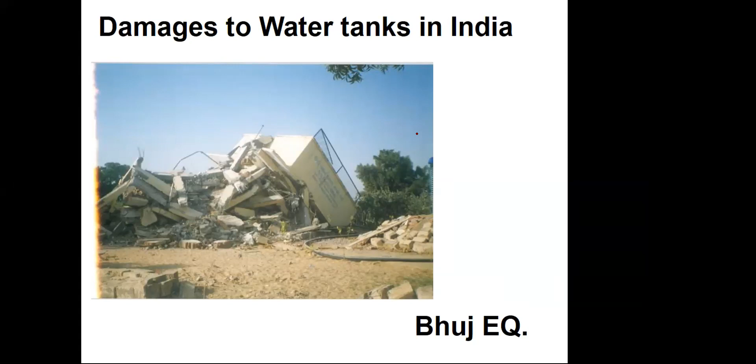But in past earthquakes - Bhuj earthquake, Jabalpur earthquake, and some northeastern earthquakes - we have seen water tanks have suffered damage. They have become non-functional if they have not collapsed. So there is need to look at these things carefully and critically.

The water treatment plant there had some ground-supported rectangular tanks. It had damage here, a crack. This type of thing.

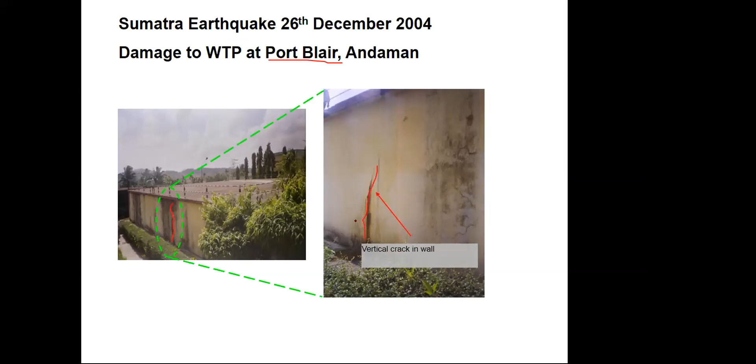Again, partially underground tank suffering damage. This kind of water treatment plant has a circular RCC tank. There is a manhole here, so water sloshed from there during the earthquake.

There is no damage to this tank as such, but during earthquake, water sloshes. Since this tank was full, water sloshed from here. When we visited that place, the maintenance people there told us that during ground shaking, water came out of this thing. So water sloshed - this is an important thing.

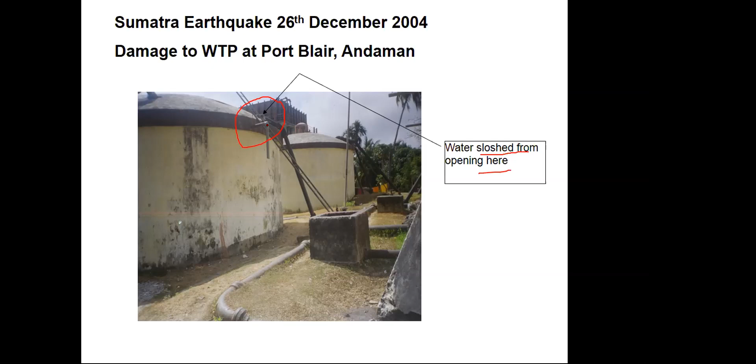When sloshing, water goes up, so it should not hit the rooftop. There should be sufficient space and things like that. So water sloshing gives useful information regarding how tanks have behaved during the earthquake.

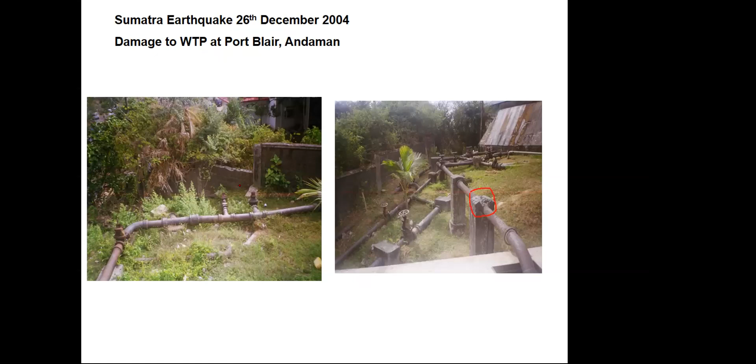Because even if the water tank remains intact but the pipeline gets damaged, then our objective that water supply should remain in place gets lost. Now this is, in brief, the occurrence of an earthquake.

There is a focus where rupture takes place or some sort of fault gets initiated. From there, stress waves travel - body waves and surface waves. The point exactly above the focus is the epicenter. Then surface waves and body waves travel, and at any location we feel the earthquake in the form of shaking of the ground.

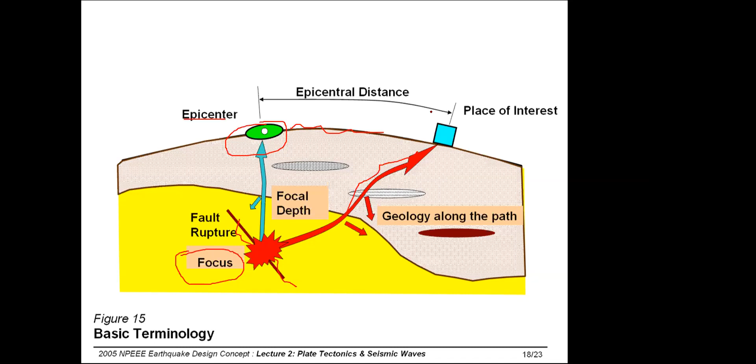How ground will shake at a particular location during an earthquake depends on many parameters: where the epicenter is located, how deep the focus is or what the focal depth is, and what is the soil media from the epicenter to the place where our structure is standing. All these factors dictate the characteristic of the ground motion at a particular location, and that is how intensity gets decided at a particular location. Magnitude of the earthquake is dictated by how big the fault has ruptured, how big the event is, how much energy has been released, and things like that.

As you must be knowing by now, the horizontal component of ground motion is more severe, more critical than the vertical component. So first we give importance to horizontal ground acceleration, though vertical ground acceleration is also important in certain cases, and due cognizance of that should be taken.

So during earthquake, ground shakes, and ground shaking is resolved into three components: one horizontal, a second horizontal component, and the third is the vertical component - like this, x, y, z, three components.

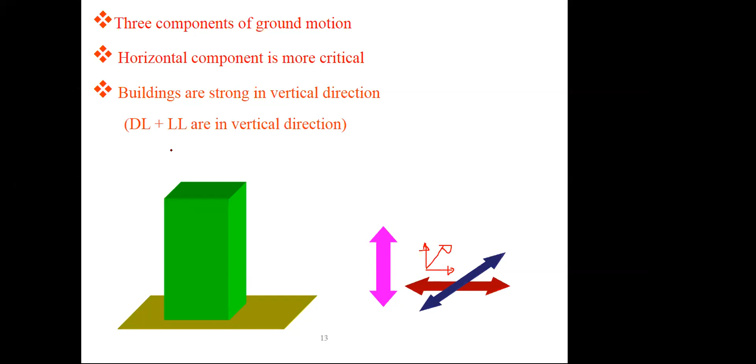And in addition to these three components, dead load and live load are acting there. Now, how much earthquake force will act on the structure during ground shaking is very simple.

Structure is standing and suddenly the ground shakes in the horizontal direction, so the structure is imparted with some acceleration. Then the force acting on the structure will be given by Newton's second law of motion. What is that? Inertia force.

Force H here is horizontal force, which is acceleration into mass. So if any body is imparted some acceleration, and if the body has some mass, then that body will be subjected to inertia force, equal to mass into acceleration. That is broadly Newton's second law of motion.

So how severe the ground motion is, how severe the ground shaking is, that will decide the value of alpha here, and how heavy the structure is, that will decide the value of m, mass of the structure. So earthquake force itself depends on the mass of the structure, mass of the building.

So many times we hear that for better earthquake response, a structure should be as light as possible. Wooden structures in hilly areas are preferred because their weight is less. Since their weight is less, during an earthquake less force will act on them, and since the force itself is less, their performance should be satisfactory.

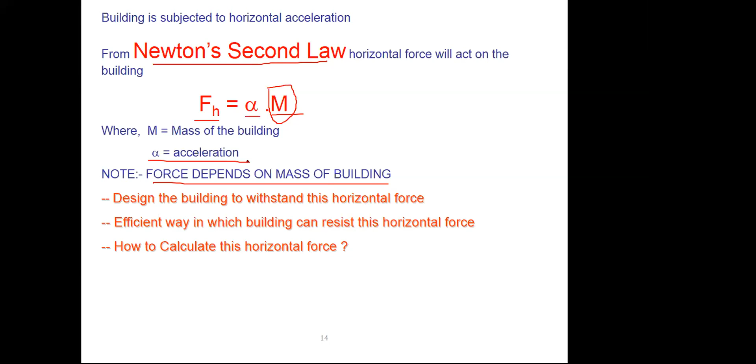And alpha, the acceleration of that structure, will of course depend on how severe the earthquake is and what is the characteristic of that body or structure.

So this is simple, alpha into m. So I divide alpha by g, and multiply m by g. Multiply and divide by g, nothing will happen. Mass into g, mass into acceleration due to gravity, is weight of the structure, W. And alpha by g becomes a non-dimensional parameter.

Precisely this is the expression given in IS 1893: the total horizontal earthquake force on a structure, V, is some coefficient AH into W. This is what you must have seen. And AH, the name given to AH is design horizontal seismic coefficient, some coefficient, a non-dimensional parameter.

For any structure, the formula for AH is Z by 2 into I by R into SA by G. Essentially this formula is nothing but mass into acceleration, but since it has been non-dimensionalized, mass has become weight, and AH has become a non-dimensional parameter.

Now there are three components to it: component number 1, component number 2, component number 3. The first component is zone, in which zone we are located. In our country, the Himalayan belt is more sensitive.

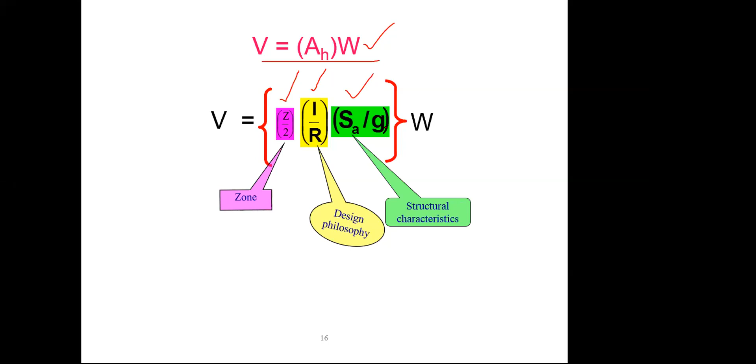SA by G is the structural characteristics. We'll see this one by one. IS 1893 was first published in 1962, and then these are the years when its subsequent revisions have come.

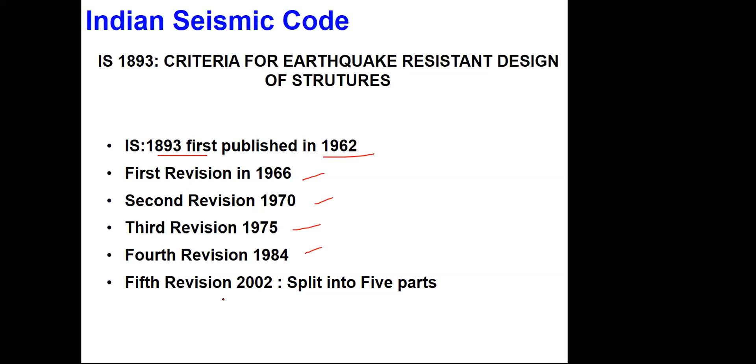In 2002 it was revised in 5 parts, and now it has been again revised in 2016. The next version has been published in 2016. The other parts of IS 1893...

This part 2, which we are discussing, was published in 2014. Bridge and retaining wall, I think Dr. Ingde will take you through this, published in 2015. Part 4, industrial structures, was first published in 2005 and then revised in 2013.

Part 5 is yet to be published, written in red color here. It is yet to come, but its draft version is in circulation, I suppose. So this is the background of IS 1893.

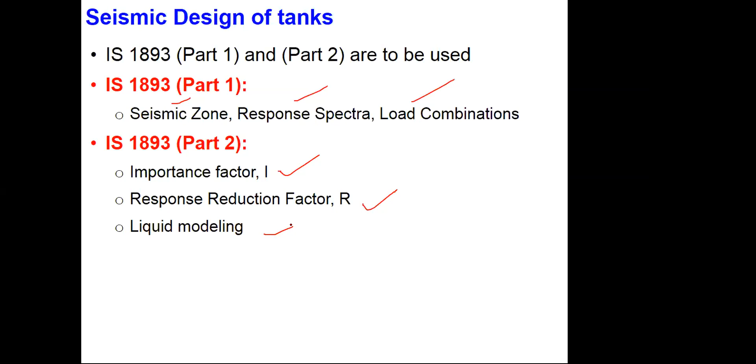Now in part 1 we have the seismic zone map, response spectra, and load combinations. Part 2, which deals with water tanks and liquid storage tanks, will give us the I value for water tanks, the response reduction factor for water tanks, and how to consider modeling of liquid, because liquid sloshes during ground shaking and during any dynamic loading.

So now we come back to this formula. As I said, Z comes from the zone map. This is our zone map.

We have 4 zones in our country: zone 2, zone 3, zone 4, zone 5. There are zone factors given for each zone. For zone 5, value of Z is 0.36. For zone 2, value of Z is 0.1. So that is the zone map.

Now we are discussing few things about buildings. For a building, SA by G will come from this response spectra. Now for building, to use this SA by G from this formula, we should know the time period of the building.

What is the natural period? What is the natural frequency? Natural frequency from structural dynamics point of view is given by under root K by M. So as such, if somebody has to find out the natural frequency, then one will have to calculate stiffness, mass, and use under root K by M.

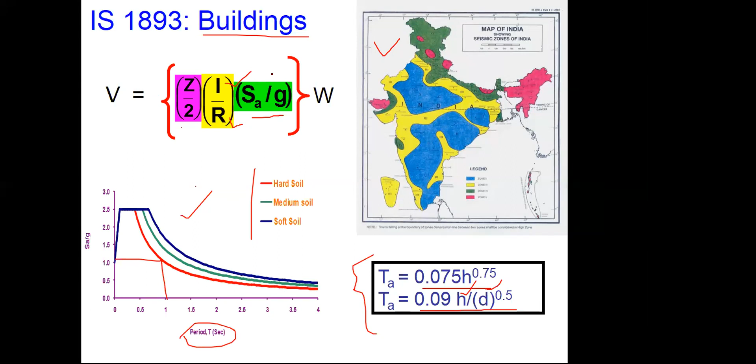Now, once you know the total force, it can be distributed to various floors in the form of hyperbolic distribution, parabolic distribution, H-I-square. And that is how you know the earthquake force for a building. So for a building, in equivalent static analysis, first step is to calculate time period, then use this formula, and then distribute the earthquake forces at various floors.

Now, for buildings, there is another method known as response spectrum method. Therein, first you have to do the modal analysis of your building to find out the modal frequencies and mode shapes. If you take first 3 modes of a 3-degree of freedom system, then you will have 3 values of A, Z by 2, I by R into SA by G corresponding to all 3 time periods. Then you have to calculate story force in each mode, then story shear at each floor, at each story in each mode, and then calculate Q1, Q2, Q3 by suitably subtracting them.

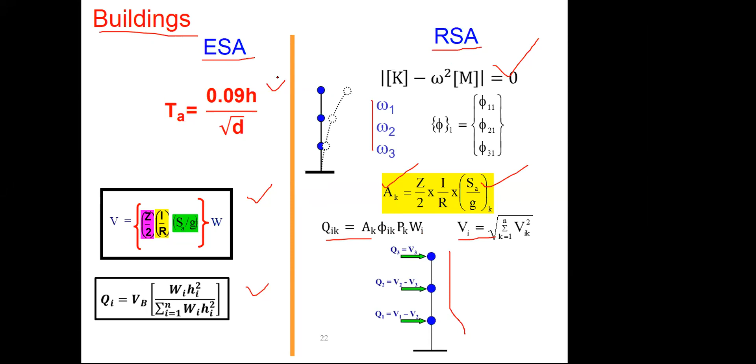So there are 2 methods: one is equivalent static analysis, another one is response spectrum analysis. For building, both have been explained in IS 1893 part 1, and accordingly one can use it.

Now, coming to 1893 part 2, this is the front page of that document. Now, what is it that 1893 part 2 will tell us? There are some scope, references, symbols, and there are some provisions. In that provision, spring mass model, since we have to model the liquid.

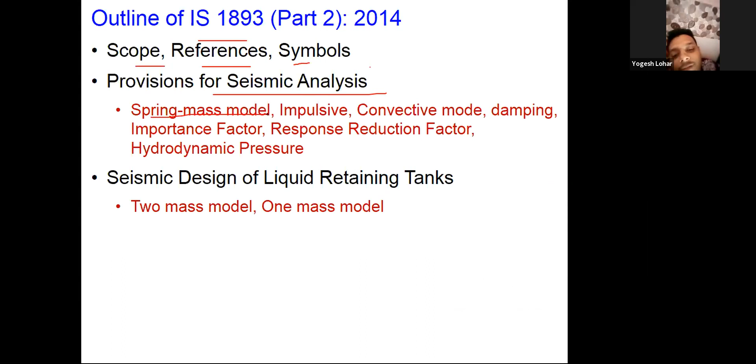Hello, sir. Hello. Khandwe sir, you are telling something? Participant has unmuted himself. You can continue, sir, please. By mistake, he has unmuted. Sir, please continue, sir. Yeah. Okay.

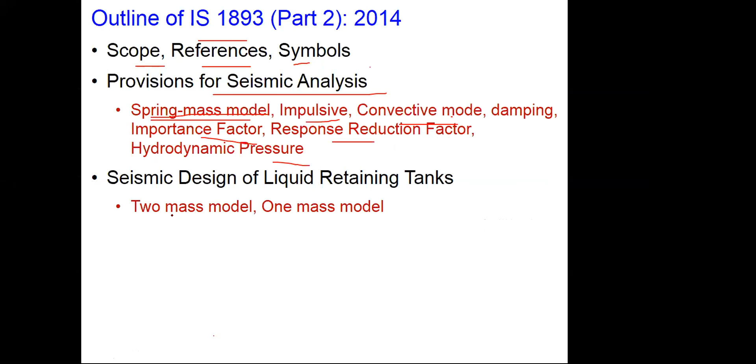So in this part 2, apart from scope, references, and conventional sections and symbols, we will have some provisions on spring mass model. What is impulsive mass? What is convective mass? How much importance factor to take? How much reduction factor to take? How to calculate hydrodynamic pressure? The spring mass model, or two mass model, for liquid storage tank is very popular, and we will see that.

Then there are some miscellaneous provisions, something for safety of piping. In steel tanks which are used in petroleum industry, the steel shell should not buckle, so provisions on that. But also for buried tanks, P-delta effect, and quality control provisions for RC frame, RC shaft, RC tank, strong column weak beam, staircase — some of these provisions are also explained.

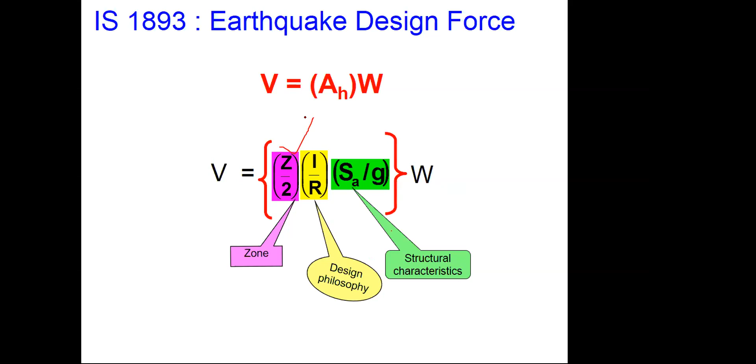So this is how earthquake force is to be calculated for water tank. Now, first we start with Z, which will remain same depending on whether it is building or tank. If you are in Nagpur, you will be in seismic zone 2, so value of Z will be 0.1. If you are in Guwahati, then you are in zone 5, and you will have to take 0.36.

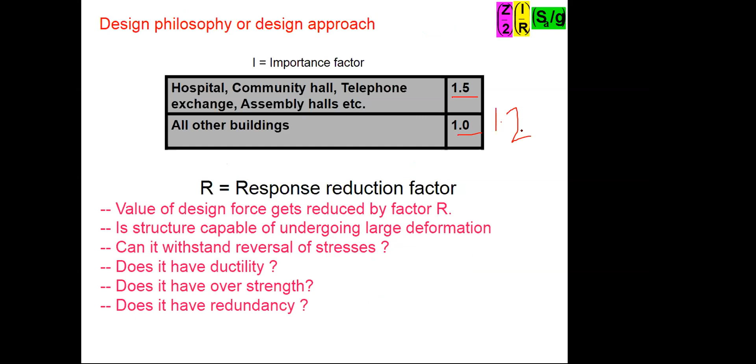So Z remains same. Now, I for building — there are two values, 1.5 and 1, and of course nowadays in the new code there is a value of 1.2 also for those flat schemes where more than 200 people stay. And R value depends on how good is the energy absorbing capacity. For buildings, typical R value is 5 or 3 for moment resisting RC frames.

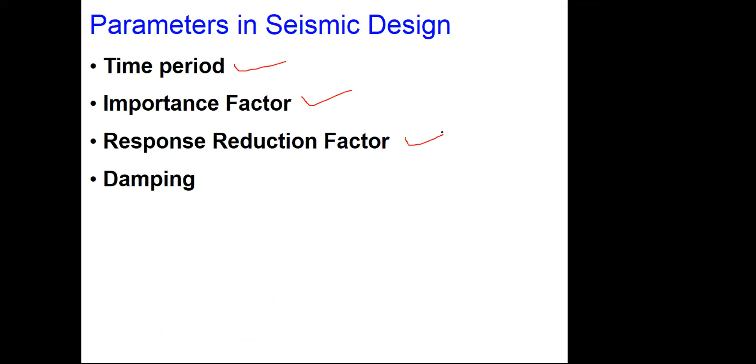So for water tank, the time period formula has to be different — we can't use 0.09H by root D. Importance factor has to be different. R factor has to be different, and of course damping value will have to be different. So we will consider these things.

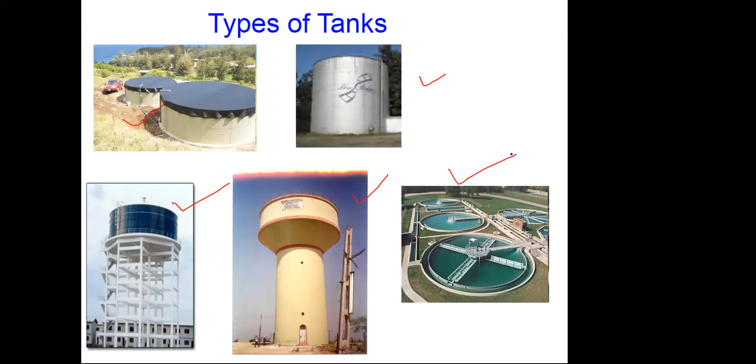So broadly these are the types of tank structures we will be dealing with: ground supported RC tank, ground supported steel tank, elevated tank on frame type of structures, elevated tank on shaft type of staging, and underground tanks. So provisions for all these types of tanks will be given — ground supported tanks, elevated tanks, and underground tanks.

Now we will start with the physics of the problem. What happens when there is a water tank filled with water or any liquid? If the ground shakes, what will happen to these water tanks? The first thing, which is different than a building, is that the liquid will slosh. There will be a sloshing mechanism, and because of this there will be pressure on the wall.

Now, pressure on the wall — there are two types: hydrodynamic and hydrostatic. Even when there is no earthquake, if a tank is filled with water — even a bottle filled with water, our Bisleri bottle — water exerts hydrostatic pressure on the wall of the bottle. But this hydrostatic pressure is uniform in all directions, and hence the bottle doesn't topple, because there is equal and opposite pressure in all directions. So for hydrostatic pressure, its net horizontal force is zero.

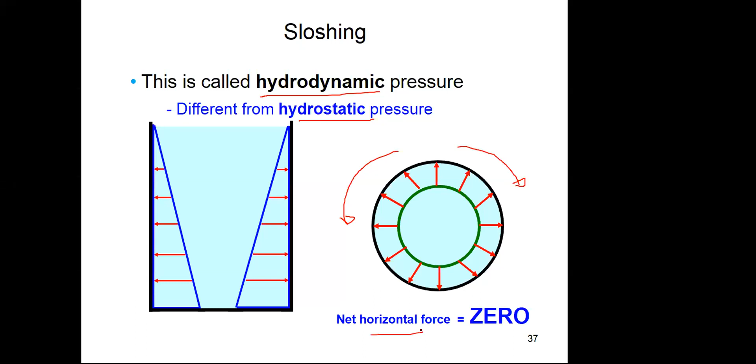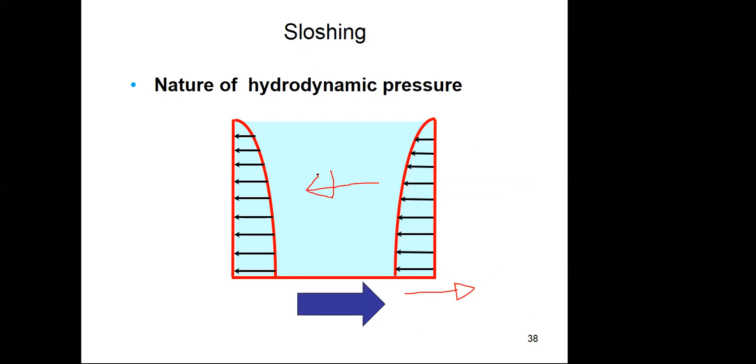Now you come to ground shaking. If ground shakes in this direction, the entire liquid will go in the opposite direction. So on one side of the wall there will be more pressure, on the other side there will be less pressure. So there will be net horizontal force acting on the tank wall in one direction. In plan, if you look at it, there is a central line of the tank — there is more pressure on this side and less pressure on the other side wall. That is how hydrodynamic pressure acts, and net resultant pressure and force will not be zero.

So liquid sloshes. Now the sloshing of the liquid is basically a fluid mechanics problem. Housner, in 1963, analyzed this by writing the fluid equations, the Laplace equation for fluid, and then he came up with a simple mechanical model known as the two mass model, where he said that some portion of the liquid will be sloshing and some portion of the liquid, which is at the bottom, will remain rigid.

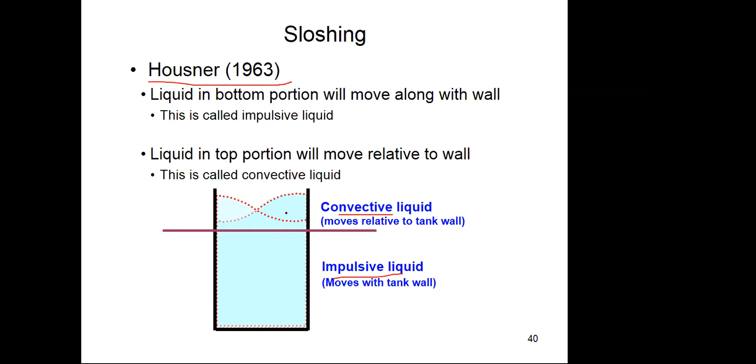It will vibrate along with the wall, whereas liquid in the top portion will be undergoing sloshing, and that is known as convective liquid. It undergoes convection. Impulsive liquid will simply be vibrating or moving along with the wall. So some part of the liquid is rigidly connected to the wall, some part is flexibly connected to the wall. So there are two types of divisions: convective liquid and impulsive liquid.

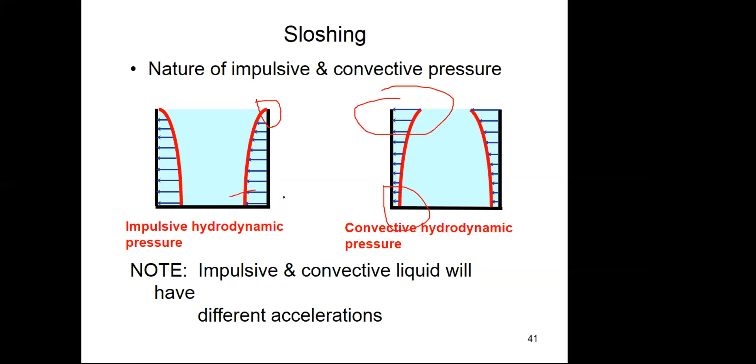They have their own pressure distributions. Convective liquid will have convective pressure, which will have more pressure on the top, less at the bottom. Impulsive liquid will have very less pressure at the top, at very high value at the bottom. So these will be pressure distributions. So there are two types of issues: convective and impulsive.

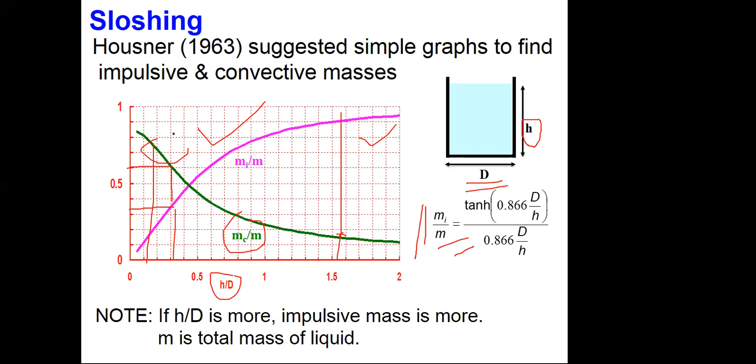So what does it mean for shallow tanks? For shallow water tanks, sloshing component of liquid will be predominant. So if liquid height or depth is less, then sloshing will be more. In Hindi, there is a saying, 'Adi ghagri chalkat jaye' - if liquid is less, then sloshing is more. If liquid depth is more, then this chalakna or sloshing is less.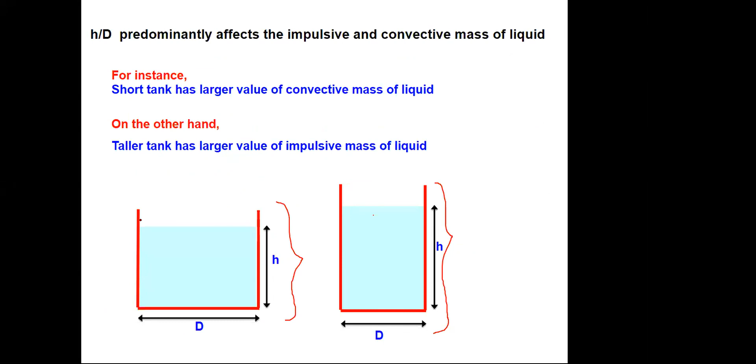So now we have sorted out the issue that there were two types of forces which will act on the tank wall: impulsive force and convective force. Impulsive force will come from impulsive mass. Convective force will come from convective mass. Then this impulsive mass will act at a height hi, and convective mass will act at a height of hc.

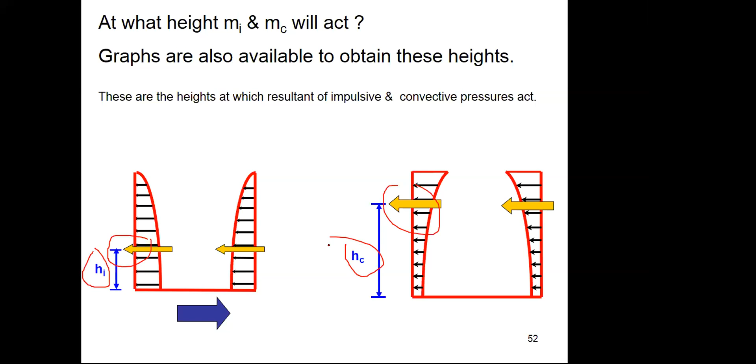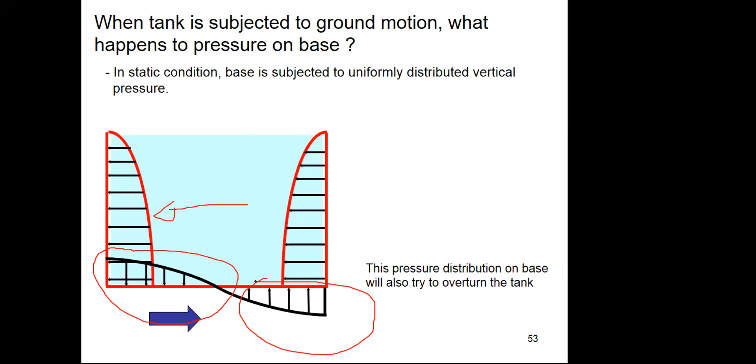Now they will create the overturning effect. Tank will have tendency to overturn because of this. Now, if liquid goes in one direction, then the vertical pressure on the base slab will also get changed. This side vertical pressure on the base will be more, this side it will be less. So this will also create an uneven pressure distribution, which will also add to the overturning. And if that effect is included, then these forces will act at still higher heights.

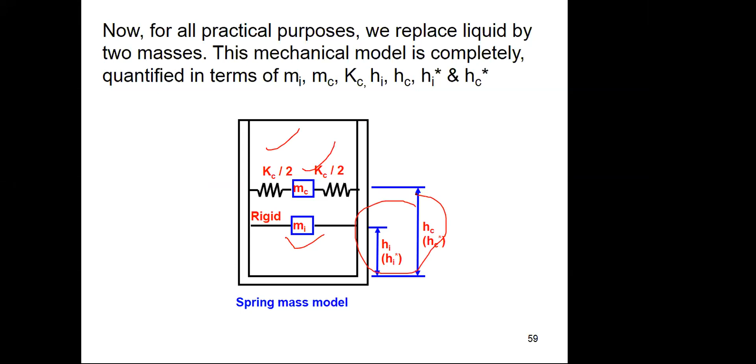Rather than hi, it will act as hi star if this base pressure uneven distribution is accounted for. Similarly, we will have hc star, and that can be obtained from the ready-made graphs given. So now we are ready. We know how much is our mi, we know how much is our mc, we know kc, we know at what heights this will act. So this whole tank filled with liquid is now converted into a mechanical model whose all the parameters are known.

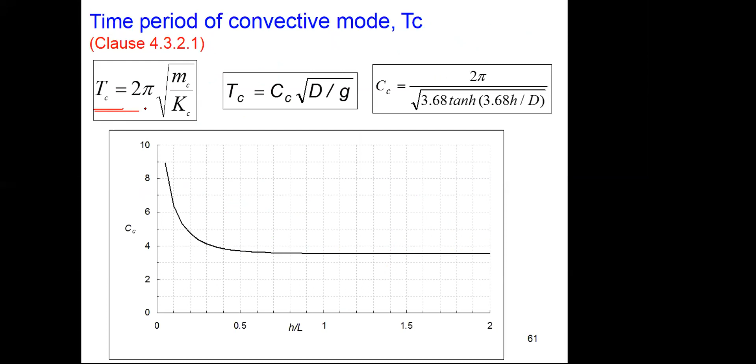Once that is known, rest of it is simple. You know mc, you know kc, you should calculate convective time period. Some ready-made charts are given for that. Then you can obtain impulsive time period also. Impulsive time period for ground supported tank will be different, and impulsive time period for elevated tank will be standard formula 2 pi under root m by k, where m will consist of impulsive mass and structural mass.

Structural mass will include what? It will include mass of container and 1/3 mass of staging. So mass of container means everything: wall, roof, slab, base slab, and staging, 1/3 mass has to be added. And Ks is the stiffness of the staging.

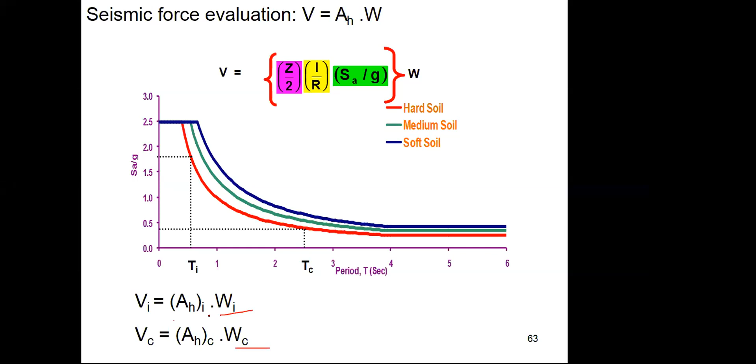So since now we have two masses, impulsive and convective, there will be two time periods. So there will be two Ah, Ahi and Ahc. We calculate these forces, and add them using SRSS, square root of sum of squares. Vi square plus Vc square and under root of that, square root of sum of squares. That is the total earthquake force which will be acting.

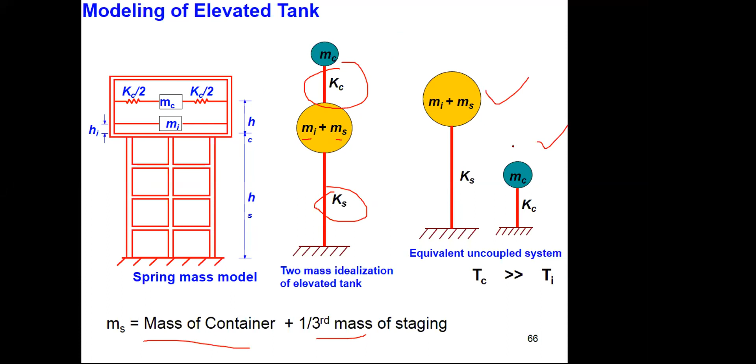Now for water tanks, you have two mass model. Ks is stiffness of staging, Kc is stiffness of convective mode. Mc is convective mass, Mi is impulsive mass, Ms is structural mass, that is mass of the container plus 1/3 mass of staging. Now, rather than solving a 2 degree of freedom system like that, one can use two different single degree of freedom systems, because their frequencies or their time periods are well separated.

You can have them separately so that complications because of solving a 2 degree of freedom system won't arise, and this assumption is valid because Tc is much larger than Ti. So that we will calculate for elevated water tank. In elevated water tank, if you have to calculate Ks, stiffness of staging, you will have to apply force P at the CG of the container, and that CG should be connected with the frame in rigid fashion, and get the delta. Once you know the delta, Ks can be obtained.

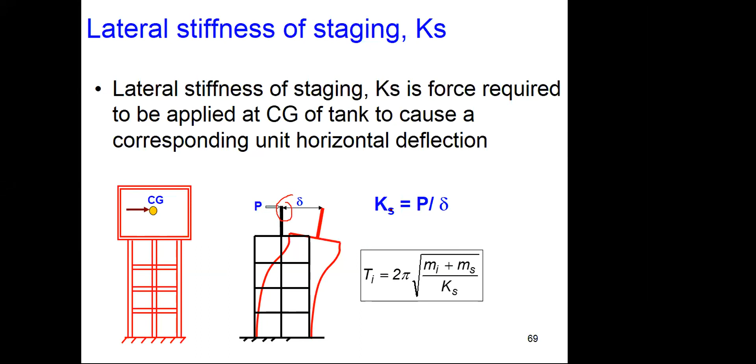This is a standard exercise in mechanics. So this is first difference. In elevated water tanks, you have to calculate time period like this, whereas in building, things were readily given. Though it's an empirical formula, it was readily given for standard or normal types of buildings. If building is having too many complications, then of course this formula will not be applicable even there.

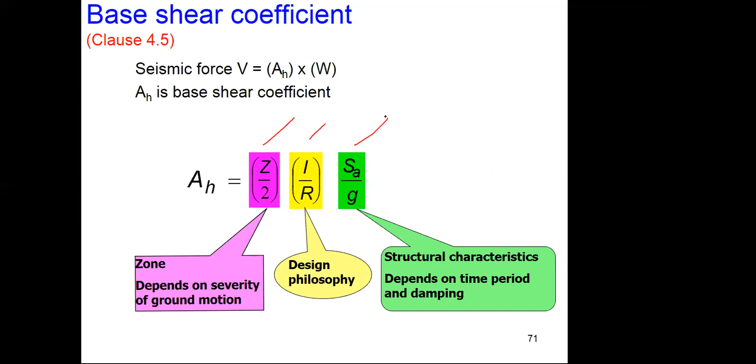So now we know Z, we know SA by G. Time period we will be knowing. I and R we will have to sort out. So we will have these two formulas and we add them.

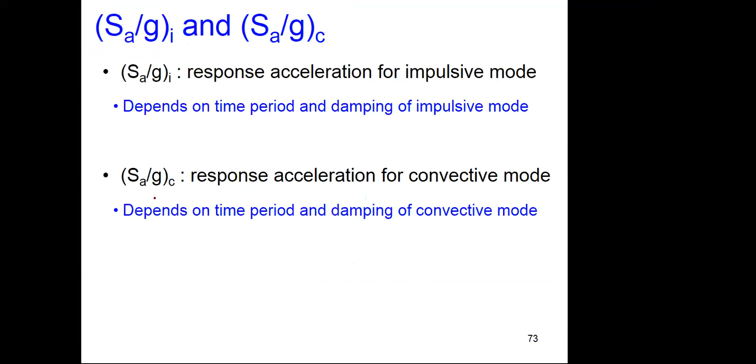Now there is one more issue. This SA by G corresponding to convective mode, damping is very less. So we consider convective mode damping as 0.5%, and hence we should multiply this factor by 1.75. Multiplying factor is 1.75. Same thing is done in other codes. Those of you are interested, Eurocode and American Concrete Institute, their multiplying factor is 1.5 and 1.673, while in our code, that multiplying factor because of lesser damping in convective mode is 1.75.

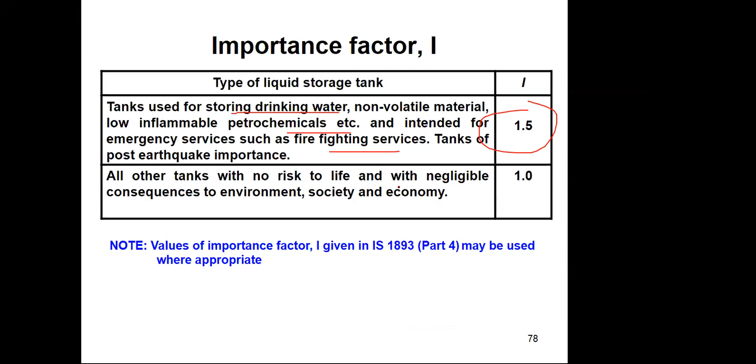That is what is here, I, importance factor. This is the table from 1893, black and white, and I have converted it into like this. So we should use I equal to 1.5 for most of the tanks - tanks used for storing drinking water, non-volatile material, low inflammable petrochemicals, firefighting services, and tanks which are important in post-earthquake functioning should all have I equal to 1.5. All other tanks which don't have any risk can have 1.

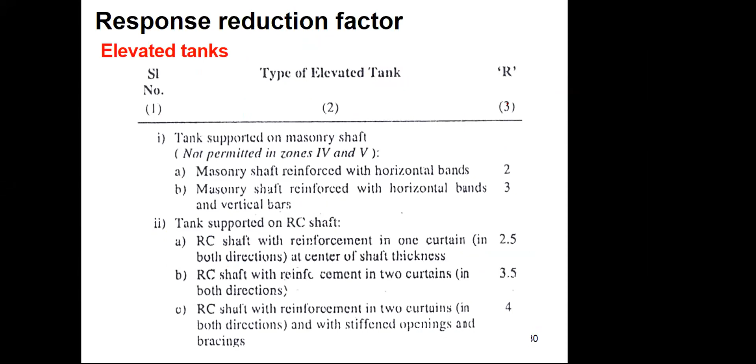Then R value, response reduction factor. Response reduction factor is given differently for different types of tanks. Let me come to that one by one. Here of course these values are given.

There are tanks which are of importance to us: elevated water tank supported on RC frame, elevated water tank supported on RC shaft, and elevated water tank supported on steel frame. This is as far as elevated water tank types are concerned.

For them, the R value maximum is 4 if all precautions are taken and all ductile detailing provisions are obtained. Or if it is an elevated tank wherein a shaft is used, then R is either 2.5 or 4. So this is how the R values are given.

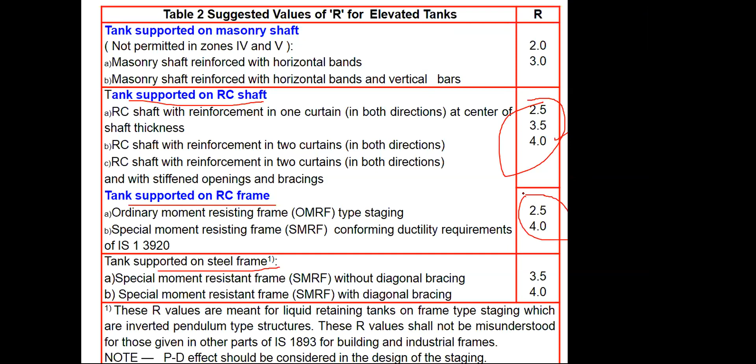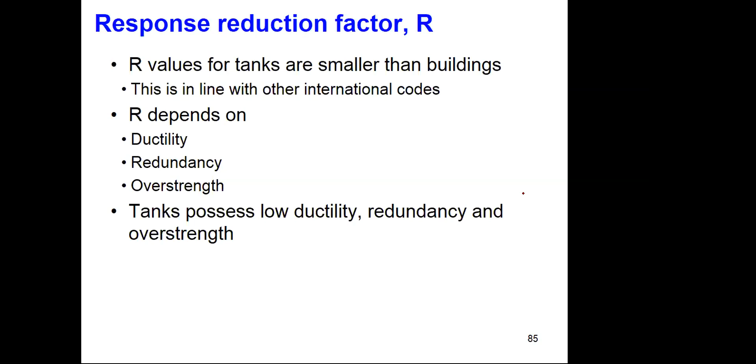Now, one can argue why R values of water tanks are different from R values of buildings, and that is a topic where additional work is required, wherein you should assess the ductile behavior of a building frame versus a water tank frame. There is a difference between water tank frame and building frame. So whereas for building R is 5, for water tank it is given as 4. But even whether 4 is sufficient or not needs to be properly addressed and sorted out.

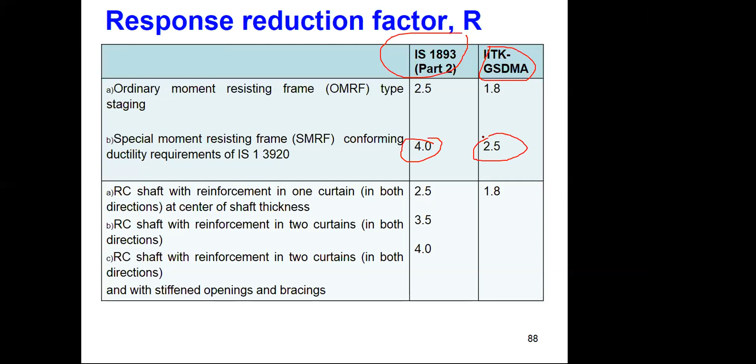Now there is a difference between IS 1893 Part 2 and the IITK GSDMA guideline. The code says you can take R value as high as 4 for special moment resisting frame, but the IITK GSDMA document says you should take it only 2.5, not more than that. So this type of difference exists, and there are bases for that which have been discussed, comparing with other international codes and things like that.

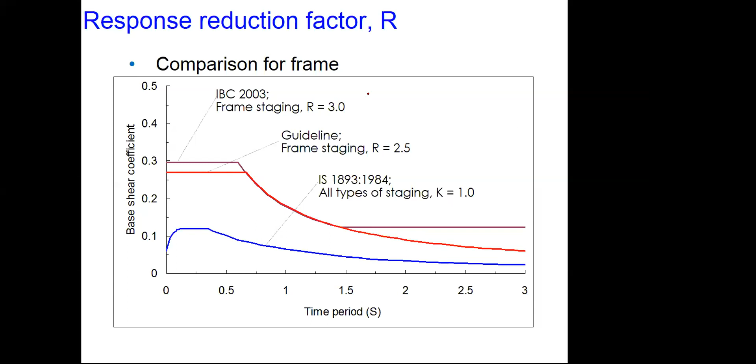Now, water tank and building have certain differences. Number of load paths in case of building are more. Buildings have walls also, whereas water tank frame staging doesn't have a wall — it is a bare frame. Then in case of building, beam sizes are quite reasonable, quite heavy, whereas in water tank, braces are not that heavy, they are nominal sizes. So R values are different for various reasons, and that is the difference between these two.

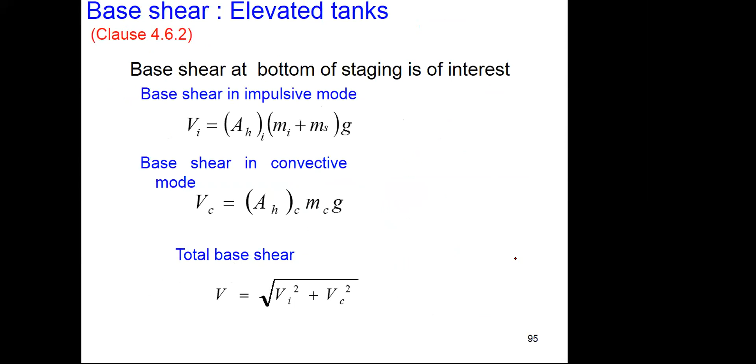Now once we know how to calculate convective time period, convective force, and impulsive force, then other forces like roof force and wall force can all be added. All impulsive things can be added together, all convective things can be added together, and then the total overturning moment will again be obtained using SRSS, square root of sum of squares, for overturning. So this is the brief of that: you calculate impulsive, calculate convective, and then total base shear. There's nothing more than that.

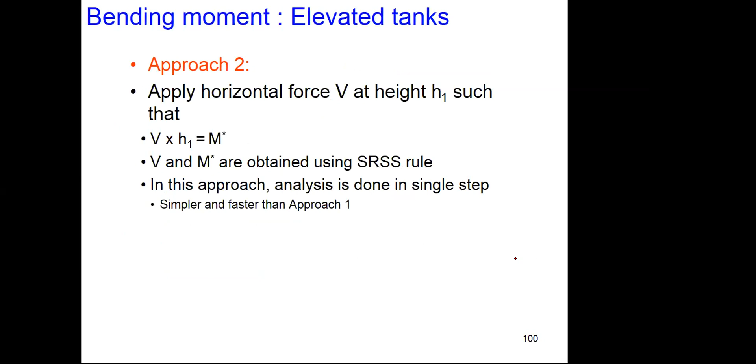There are some additional things. In another 10 minutes or so, I'll try to finish off. The main part we have discussed is how to calculate earthquake force and how to apply it.

Now, empty tank should also be analyzed. You should analyze tank full condition, but one should also analyze empty tank. What will happen in empty tank? Mass will be less, but since mass is less, your time period will get reduced, so your Sa/g value could be higher, though your W itself has reduced. So the critical condition should be analyzed in case of empty tanks. Empty tank analysis should be done.

Next is direction of seismic force. In case of building, what is the provision? The provision is that if a building has orthogonal frames in plan, it should be analyzed first for loading in the X direction, next for Y direction, and they should not be combined together. You should treat both as two different cases.

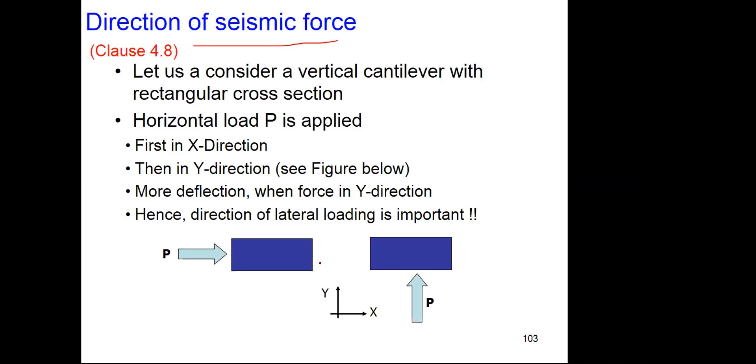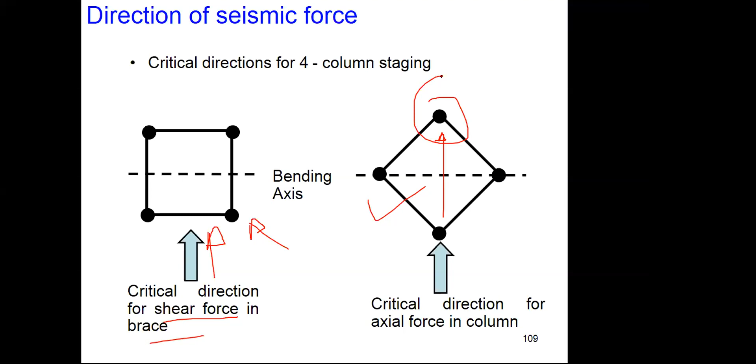Now, in case of water tanks, the critical direction should be obtained. Let us see this. If you have an elevated water tank with 4 columns, and you analyze the building for earthquake in one direction, you will find shear force in the braces is very high. But if you apply the earthquake in the diagonal direction, then axial force in the column is maximum. So for column design, you should apply earthquake in the diagonal direction, and for beam design, you should apply it in either the X or Y direction. Similar guidelines exist for 6 column staging and 8 column staging as well.

If critical direction cannot be ascertained, then the 30% rule should be applied: 100% in X direction plus 30% in Y, and vice versa — 100% in Y and 30% in X. Or SRSS can be done.

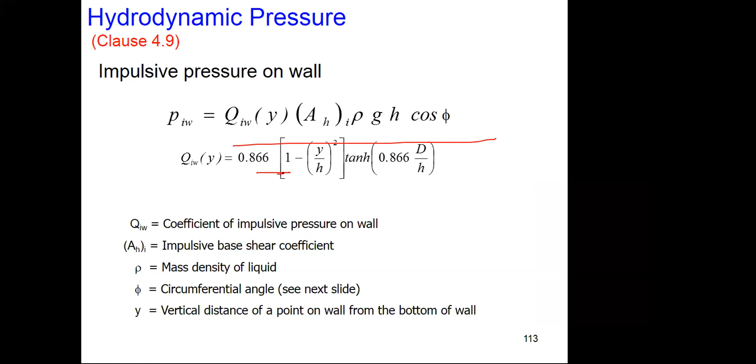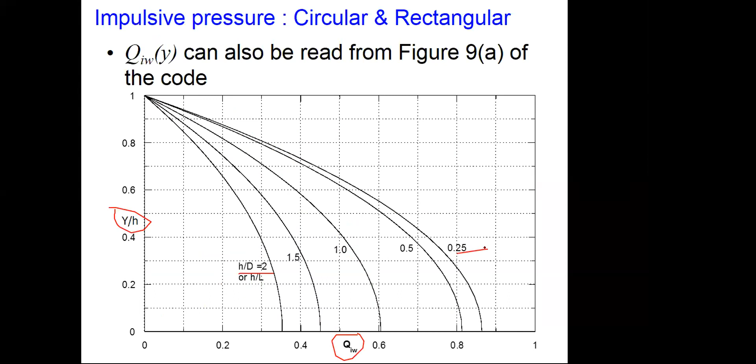Okay, so this is how impulsive pressure varies along the height of the wall, this QIW coefficient. It's a function of H by D, and here H by D is 0.25, meaning very shallow tanks. These pressures can be obtained for circular tank as well as for rectangular tank. There are ready-made formulas given for pressures and coefficient of pressures.

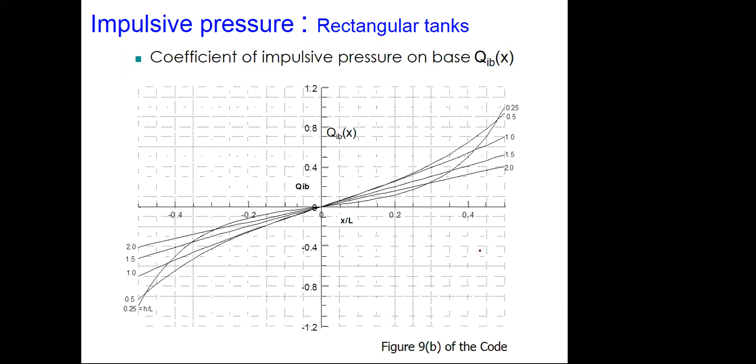There were some corrections. You can take note of this in some of these graphs in IS 1893 part 2. I think in the amendments now they are correcting it. So pressure graphs have to be used carefully. As I said, they are taken from the IITK GSDMA document, so you can refer that document. That document has correct graphs and correct figures at various places.

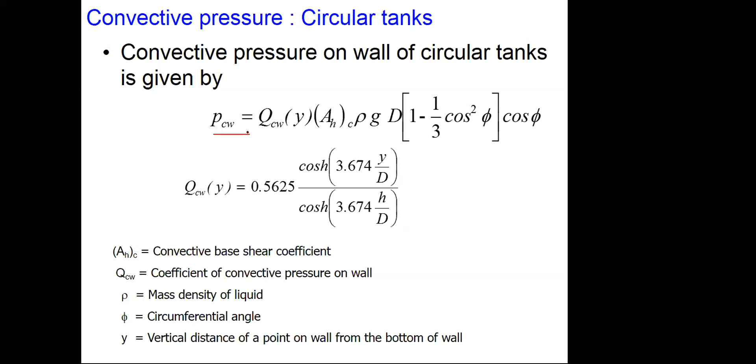Convective pressure and impulsive pressure both have to be calculated on the wall. This is for convective pressure. Then on the base also, water pressure will exert, that should be calculated. Again, same thing for wall, convective. So pressure on the base, that can be obtained.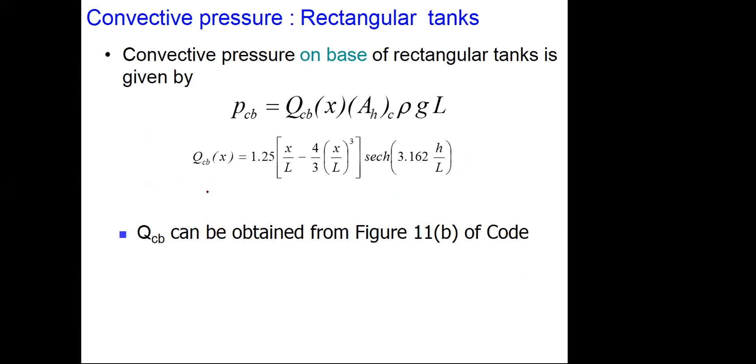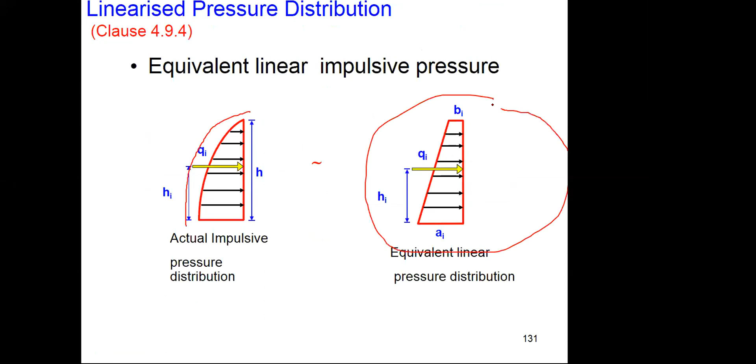Now a few things about how to design the wall. Total pressure acting on the wall is impulsive pressure plus convective pressure. This impulsive pressure distribution, which is parabolic, is converted into a trapezoidal shape, and this trapezoid is further divided into one rectangle and one triangle. From IS 3370, you know the moment coefficients for uniform loading as well as for hydrostatic loading, so the total moment exerted on the wall can be obtained. Similarly for convective mass also.

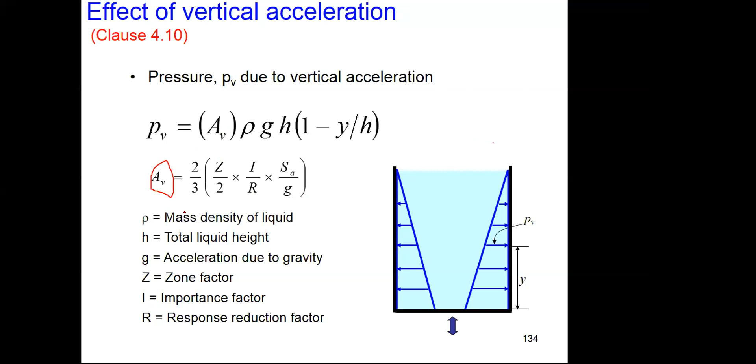Then if vertical excitation is included, water weight will increase and decrease because of change in G value. Like when we go up and down in a lift, we feel as if there's some problem in our stomach because of change in the weight - sometimes we feel weight loss, sometimes we feel heavy and our legs suffer some sensation. So all those things happen. AV, the coefficient of vertical acceleration or design coefficient, is given by 2/3, and the value of Z by SA by G will also be something different.

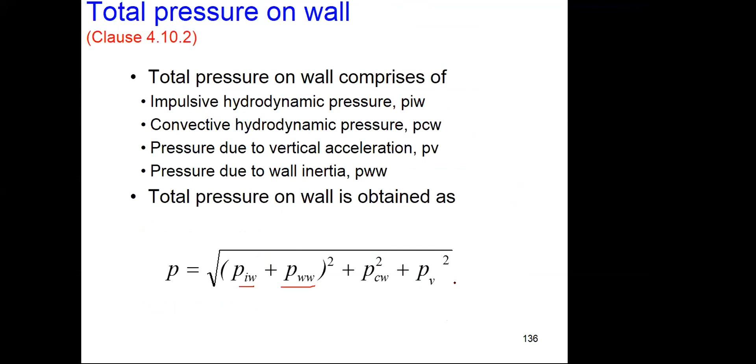Pressure on wall will exist, so you will have to combine all this pressure - impulsive pressure on wall together, convective pressure, and then vertical pressure. They have to be added using SRSS. Then sloshing wave height - when liquid will slosh, that wave height can be calculated, a ready-made formula is given for that. One should ensure that the free board provided at the top, particularly in water tanks, should be sufficient.

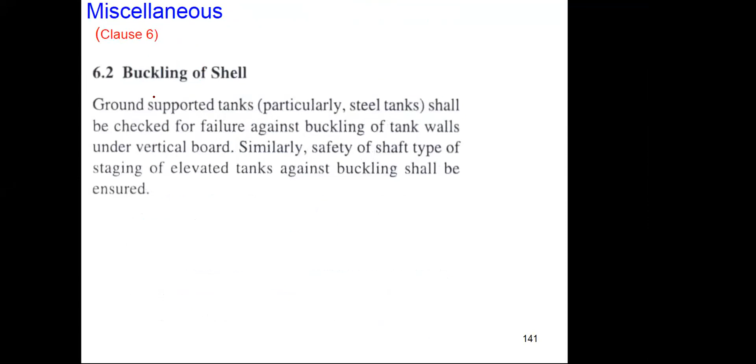Now these are the miscellaneous provisions. There is a provision on piping, it should be flexible enough. Buckling of steel shells - buried tanks have some provisions too. Shear transfer: in the case of elevated water tanks, the container and its base slab are very rigid, then suddenly flexible staging starts, so at that place shear should be properly transferred. The code says P-delta effect should also be taken into account.

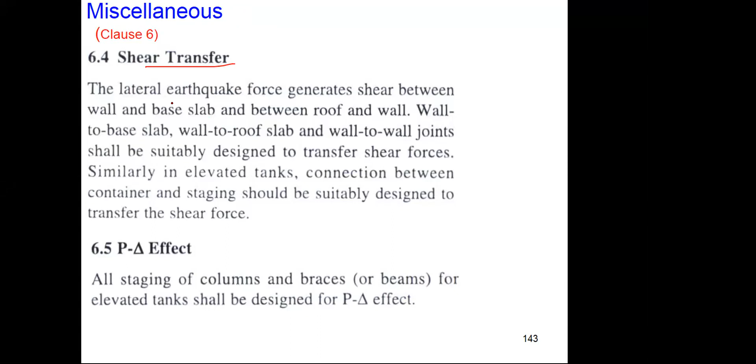Then aesthetics - these are some of the clauses. It says water tank, all said and done, is a landmark structure in any city, village or town, so it should look reasonably good. Aesthetics should not be compromised too much. If there is a proposal to provide an elevated water tank with some architectural features, they should be entertained and proper precautions should be taken. Then quality control.

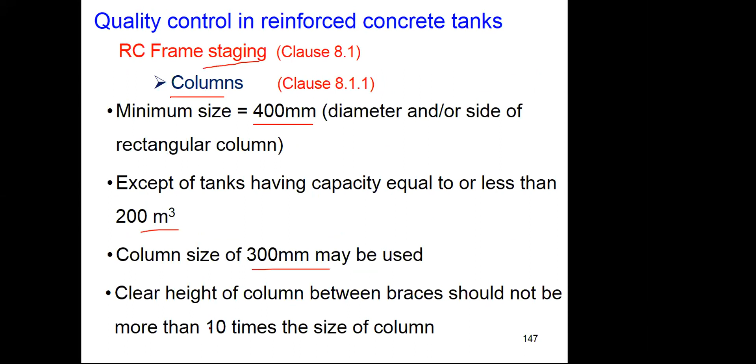Some of the things I will quickly tell: for columns in RC frame staging, minimum size should be 400 mm. If the tank is very small, then you can provide 300 mm. Column height between two braces should not be more than 10 times the size of the column, so bracing should be provided. Then reinforcement detailing should be done as per IS 13920.

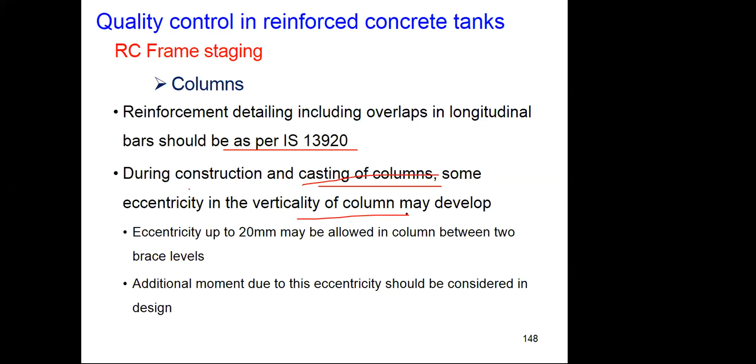So some precautions have to be taken, as given here, for columns and similarly for braces. The minimum width should be 1/30th of its clear length, and in zone 4-5, diagonal bracing should be provided.

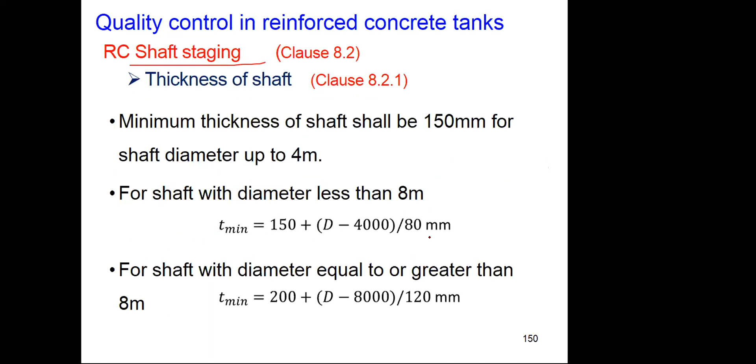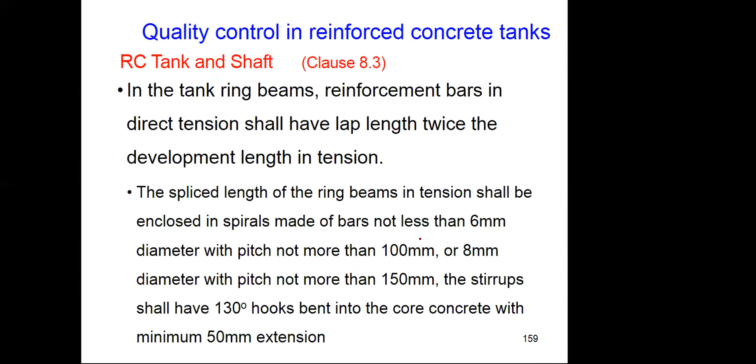For foundation, similarly provisions are given for RC shaft. How much should be the thickness of the shaft? Thickness of the shaft, its reinforcement, and things like that - quite a bit of information has been added here, and they are useful for shaft as well.

Strong column, weak beam - it exists in buildings also, so that will continue in elevated water tanks. For water tank staging profile, there is a code IS 11682. Those of you who are interested can see the provisions of this, and they will have to be followed.

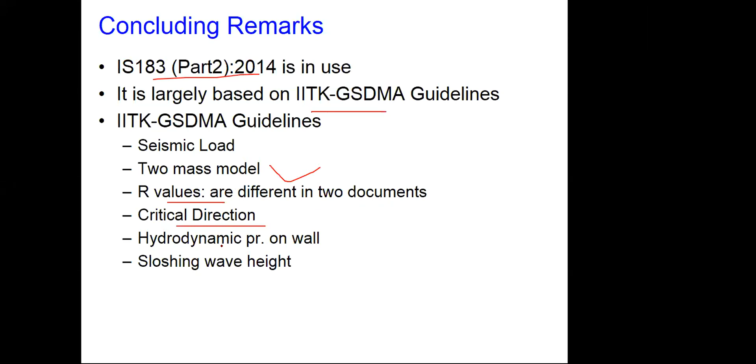So in conclusion, we have both documents - IITK GSDMA guideline and 1893. We have two mass models, and we should properly understand how convective and impulsive masses come. R values, I values, critical direction, hydrodynamic pressure, sloshing wave height - these are some of the provisions. Thank you.

I will be happy to answer. There are some questions in the chat box - one is from Sandeep Patil. Let me start from the top. Which criteria are considered to design the dam or reservoir in earthquake zone? Can you please explain in short the forces acting on the dam wall?

Now see, for dams, the situation is the same - there will be hydrodynamic pressure on the dam wall. Part 5 has not come up yet, but the draft version of IS 1893 part 5 is in circulation. Also, IITK GSDMA has a document on earthen dams. You can refer that document too, wherein block theory, to calculate the stability of the earthen dam, has been discussed, along with provisions to calculate earthquake forces.

Broadly, there will be inertia force because of the wall of the dam itself, and hydrodynamic pressure acting because of the reservoir. In case of a dam, since the length of the water body is very large, there are other provisions that should also be considered. In IS 1893 of 1984, there are provisions on dams - you can refer that too, provided you get hold of IS 1893 of 1984, which was in use up to 2002. When 2002 came, then it got divided into parts. So that much information I would like to give.